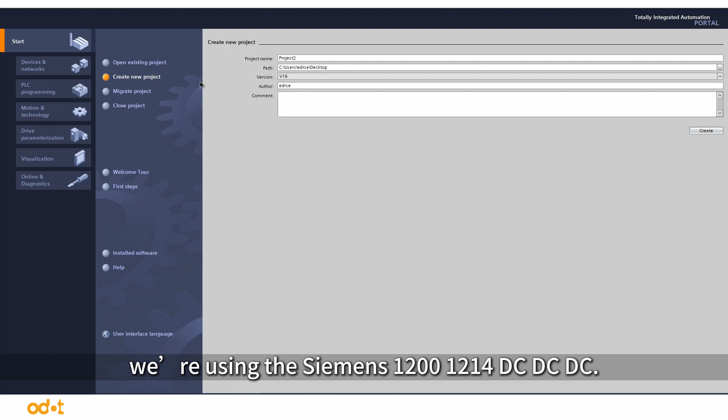Hey everyone, today we'll be introducing the simple use of the ODOT CN8032. For this demo, we're using the Siemens S7-1200 DC.

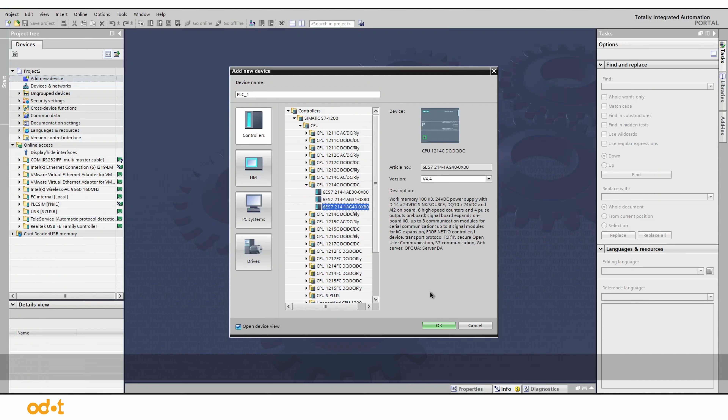First, create a new project. Click OK. Once the project is created, click to open the project view. Next, click to add a new device. Expand the list and find our 1214 DC. Choose the corresponding PLC based on the order number. Then, click OK. And that's it. The project is set up.

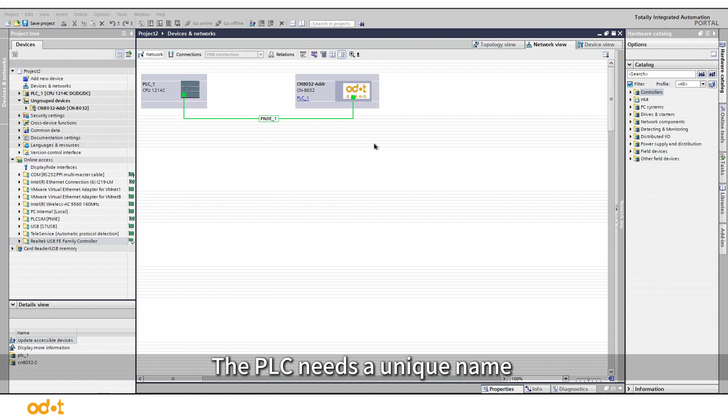Once the project is created, click on Network View for network configuration. In the hardware directory on the right, find other field devices. Expand the list and select CN8032. Drag it into the configuration view. Click Assign to PLC. The PLC needs a unique name to connect to the network adapter. So now, let's set the device name.

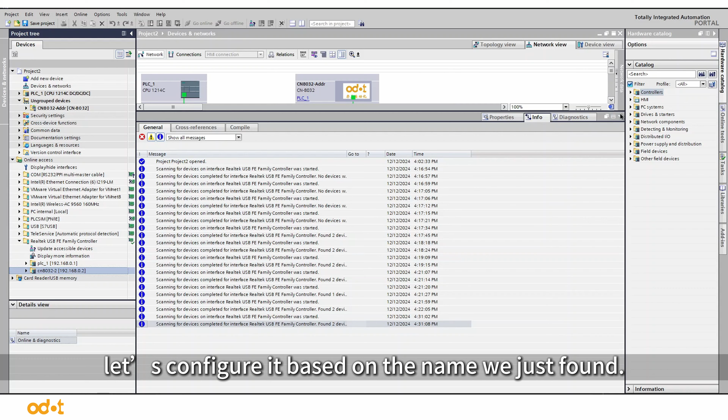In the device section, find the network card for the adapter. Double-click to search for accessible devices. Our network adapter's dip switch is set to 2. You should see the CN8032 with the suffix -2. Select the network adapter. Now let's configure it based on the name we just found. Right-click on the module and choose Details. Uncheck Auto Assign IO Names. Manually change the IO name suffix to 2.

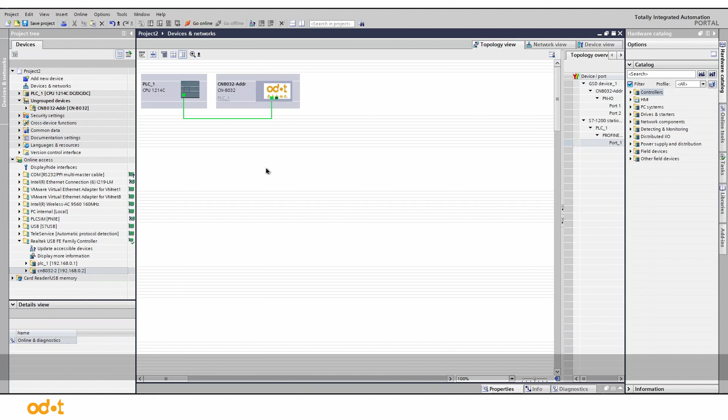Next, switch to the network topology view. Connect the PLC's network port to the module's port 1. And that's it, topology setup is done. Make sure the connections match the physical hardware exactly. If the PLC isn't connected to the correct hardware port, you'll get an error. If you only have one slave device, topology connections aren't necessary. But if you're working with multiple devices, it's better to set up topology connections. This ensures safety and reliable connections.

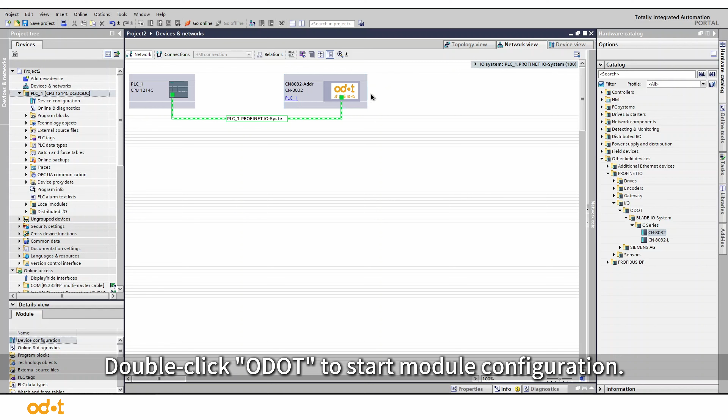Now, let's configure the modules. Double-click ODOT to start module configuration. We'll configure the following modules in order: 16-channel input, CT-121F; 16-channel output, CT-222F; 8-channel analog current out, CT-4238. Make sure you select the correct modules. Incorrect configurations can cause PLC errors.

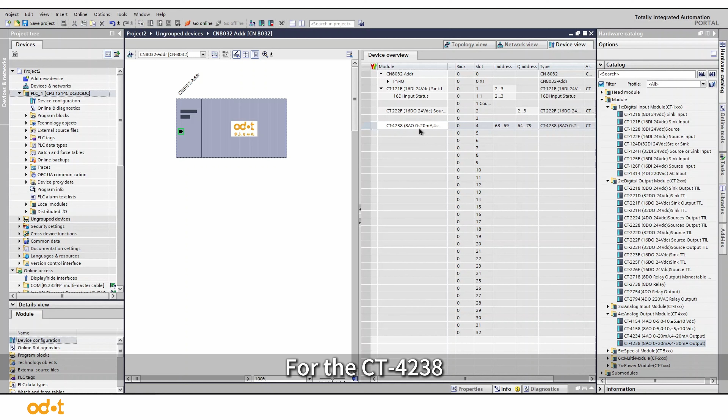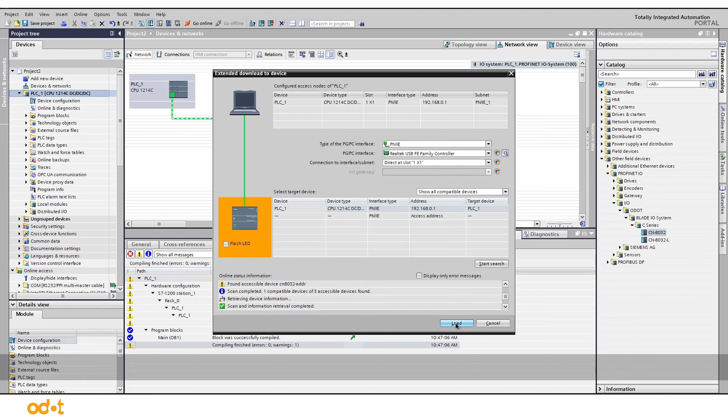For the CT-4238, right-click and open Properties to set the analog output type. You can choose either 0 to 20 milliamperes or 4 to 20 milliamperes. Here, we'll stick with the default 4 to 20 milliamperes. Once everything is set, click Save and download the configuration to the PLC. Click Search, then Download. Select Download without synchronization and click Stop all loads. Once done, click Complete and then go online.

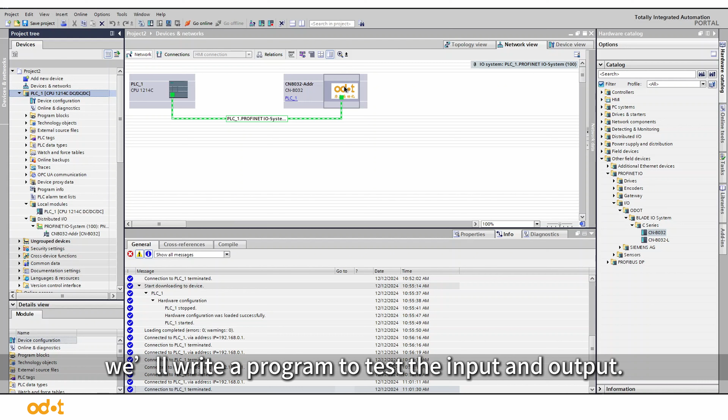Now, let's check the PLC status. As you can see, the PLC and modules are running normally. Next, we'll write a program to test the input and output. The input address is IW2 and the output address is QW2. The analog output address is QW64. Open the main program to write the code. When I2.0 is on, it outputs to Q2.0. Then, use the move instruction to assign the value of MW100 to QW64.

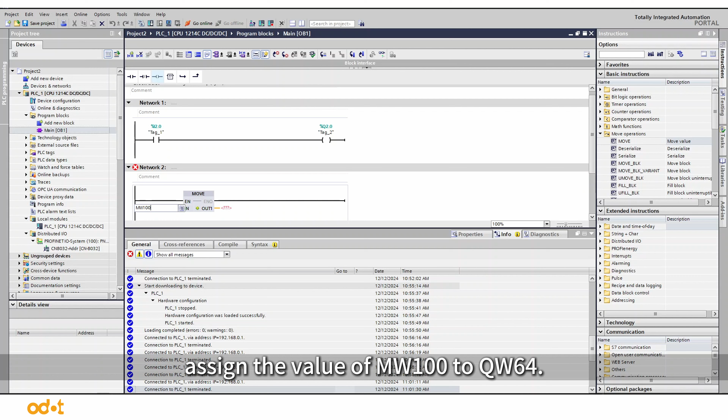Download the program to the PLC for testing. Select Download without synchronization, then click Load. After that, click Complete. Go online and start monitoring. Now let's activate the PLC's inputs and outputs to check if everything is working correctly. You can see that when activated, the output lights up. We've tested it multiple times, and it's working perfectly.

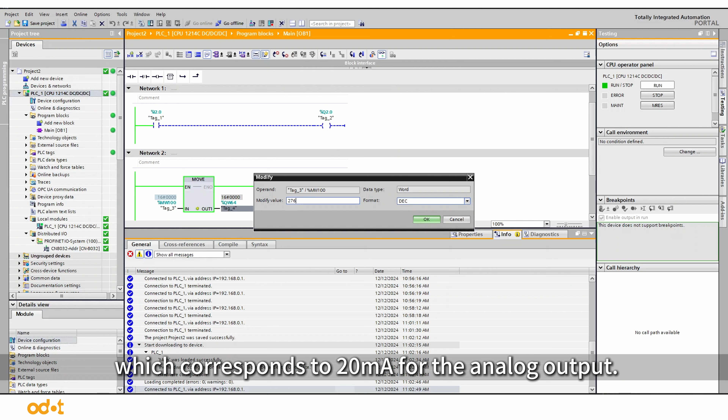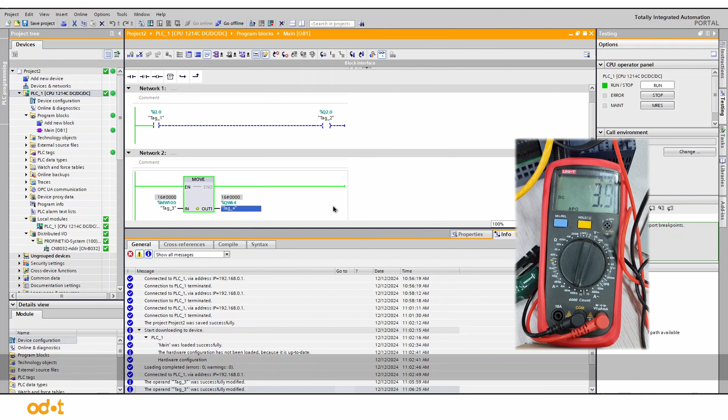Next, let's input the decimal value 27648, which corresponds to 20 milliamperes for the analog output. We'll use a multimeter to measure the analog output by connecting it to the channel. Some slight errors in the reading are normal. As you can see, the analog output is displaying correctly. Now, let's write a value of 0. The analog output should now show 4 milliamperes. And as you can see, 4 milliamperes is displaying properly.

Finally, we'll input 27648 to test again. Remember, 27648 is a decimal value. Don't enter the wrong format. You can see the output switches to 20 milliamperes. The output is functioning as expected. That wraps up today's demonstration.